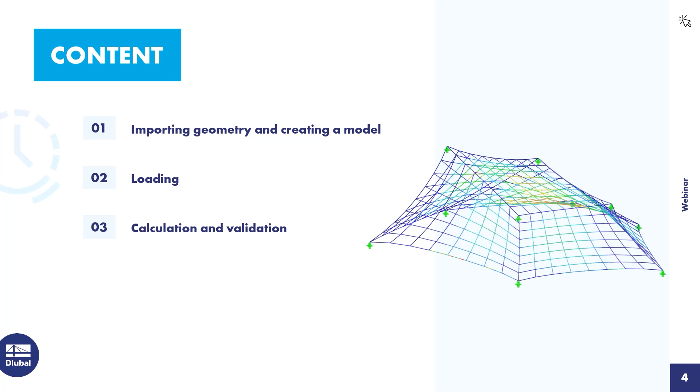So imagine myself being a civil engineer and an architect comes up to me and says, I designed this cable net structure, which is supposed to be a climbing frame for children, and I ask you to construct this. So you have the task now to find the right pre-stresses for this cable net structure so that the shape and geometry stays put and maintains the shape like the architect wants it to be, as he designed. So this is the scope, and let's go into the software and have a look how to do this.

At first, we need to create a new model. I'm going to name it simple cable net. And I'm going to deactivate surfaces and solids as I don't need them, so the data navigator becomes a little bit clearer.

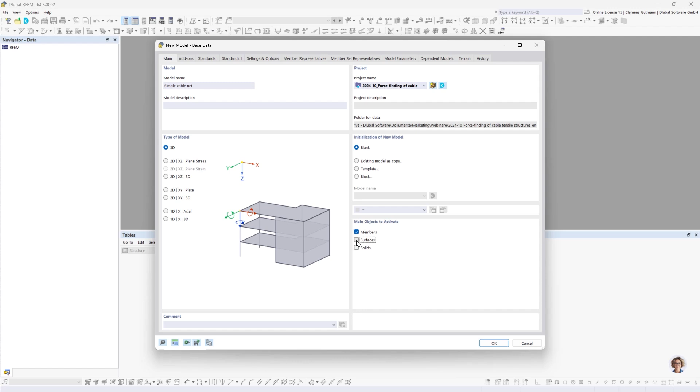Additionally, of course, we need the add-on form finding.

We then proceed with the modeling, and my simple cable net shall consist of an arch with a gauge of 1 meter and a width of 10 meters.

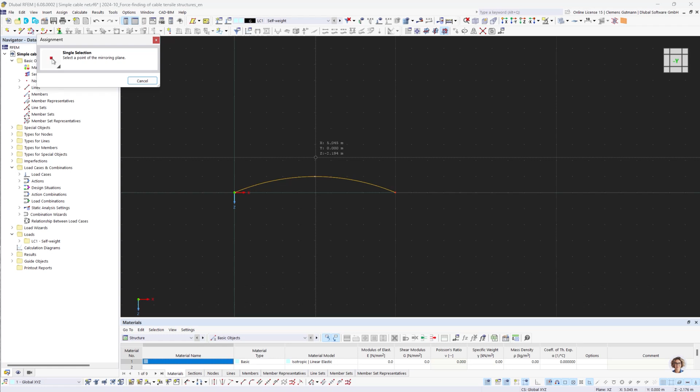I then want to mirror this about the XY plane and the center point, one time. Sorry, I made a mistake, forgot to check the copy option. And these two arcs I want to connect by straight lines.

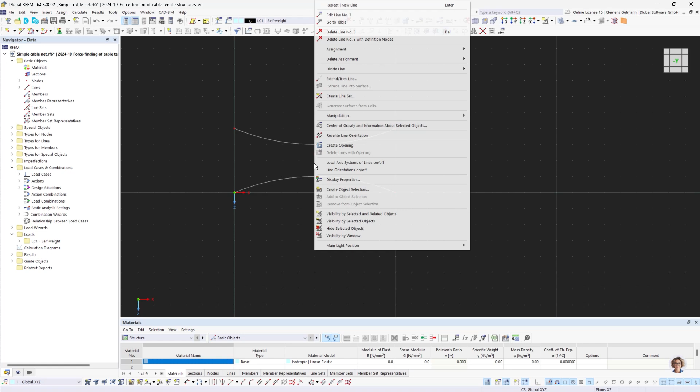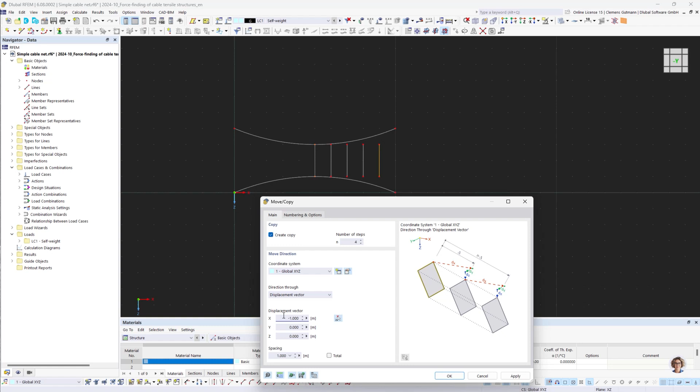And those straight lines I want to copy with a distance of 1 meter in either direction, so 1, 2, 3, 4 times, at 1 meter, hit apply, and then again in the other direction.

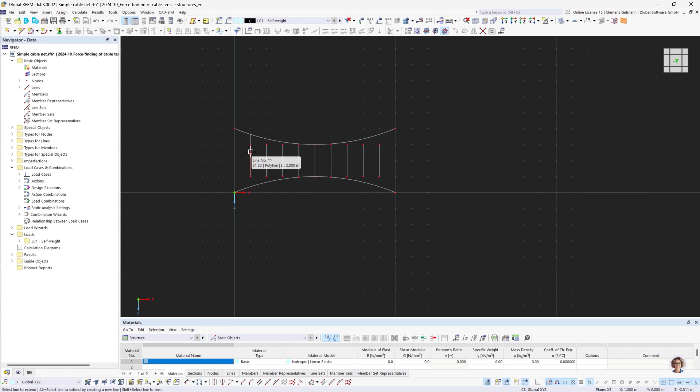I want to connect those straight lines now to the arches, and there's a quite handy way to do this. There's an option that hasn't been available in the software for too long, the extend graphically command. There's also the opposite command, trim graphically, which does the same but the other way around. If I click on it and hover over the end of a line, it automatically searches for other lines in that plane and creates a preview where an intersection has been found. If you click on it, the intersection is made and the line is extended to the other line. That way, complex intersections can be made quite easily and fast.

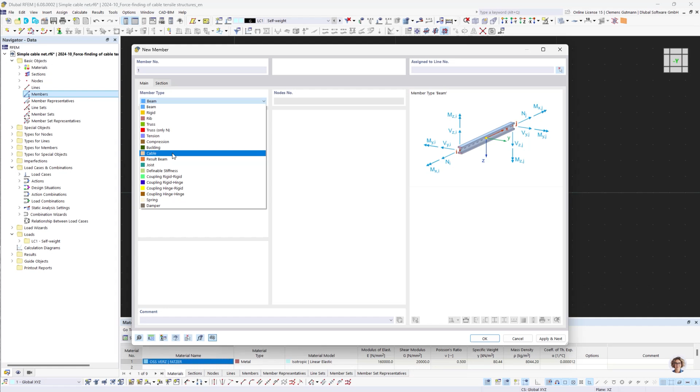Okay, and a section, a round bar section with 10 millimeters diameter. I then want to assign this section to all the lines I've created, and of course the member type is supposed to be cable. Select all lines.

The colorful squares you see is an indicator that member representatives have been found. This is quite a handy feature if you want to design a structure. The software searches for members that have the same property and the same shape and groups them together in a so-called member representative. But since I do not want to perform a design today and every member is different, I deactivate this in the display navigator.

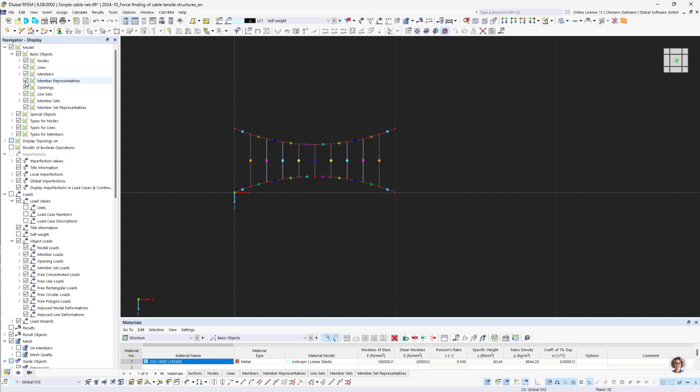Next step would be to assign a nodal support to the corners. Let's make them a little bit bigger.

Okay, and now we can define our load cases. Today I do not want to use the self-weight for this model, but just a pre-stress load case.

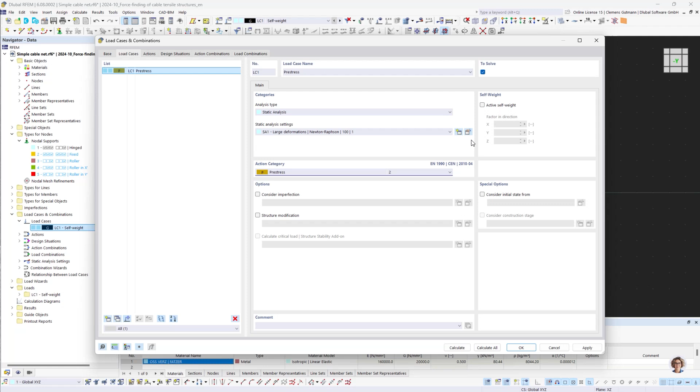And there's another setting that we have to adjust, and that is in the static analysis settings. So I'm going to edit those. If you activate the form finding add-on, you get a new tab for the add-on here, and there are 3 options that I'm going to explain to you very quickly.

The number of iterations for loading pre-stress determines how often the form finding solver tries to find a solution for the boundary conditions that you gave to him. So if you define form finding loads, either force loads or geometry related loads, those are boundary conditions for the form finding solver, and he tries to find a solution that matches the boundary conditions the best.

Usually if you perform form finding, 15 is a good number, but since we want to do a force finding and we want to get a very exact result, I'm going to increase this number to 60. Depending on what model you want to force find, you have to try out yourself what number fits best. At a certain point, if you increase the number further, it will not result in a better result.

The second option is the speed of convergence. This is a setting where you can influence the stiffness of the members and the membranes. This is especially interesting if you have structures with large deformations during the form finding process.

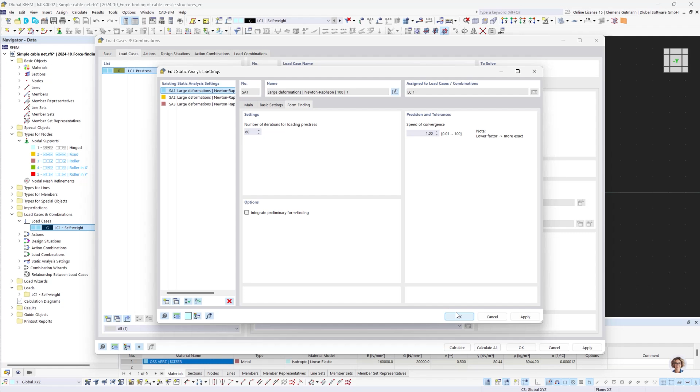Since we do not want any deformations, those last two options are not for us today, but I still wanted to explain them to you. We click OK, and again OK.

Now we can define our member loads, and for this I'm going to use the load type form finding, of course. At first I want to create an average force in member definition for the member in the center.

It's going to be 1 kilonewton, but as you may know, with form finding, it's actually irrelevant what size you pick. What matters is the ratio in the different directions. So you could also pick 10 or 0.1 or 5, whatever you like. It's just a reference for the form finding solver to find the pre-stress level.

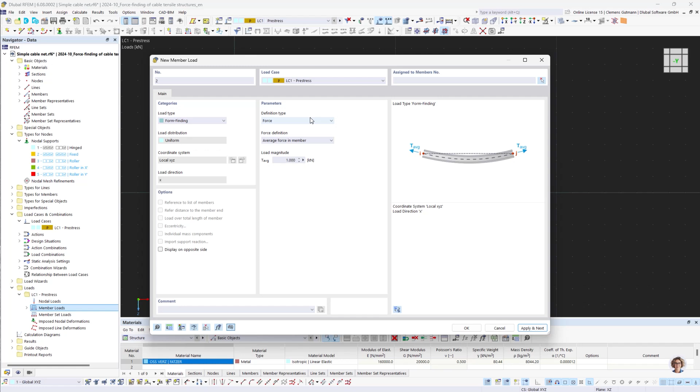Okay, we click apply and next. And to all other members, I want to assign a geometric form finding load with 100% length, so that all those members maintain their length. I'm going to assign those to all other members. Okay, and okay.

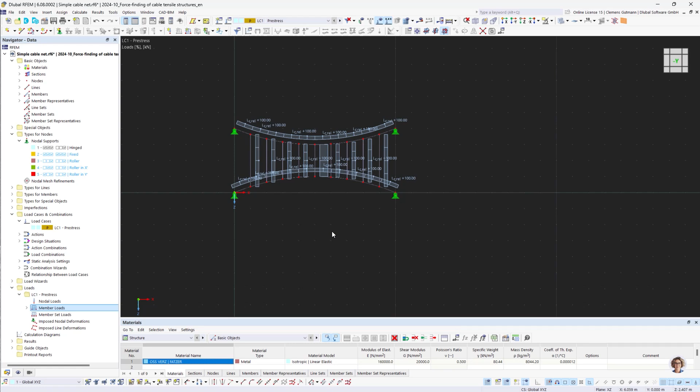Now we are ready to calculate this load case.

Let's have a look at the result. The result is not as good as I hoped, and there's a specific reason for this. Since the force finding method derives from form finding, it is impossible to force find a structure that cannot be form found.

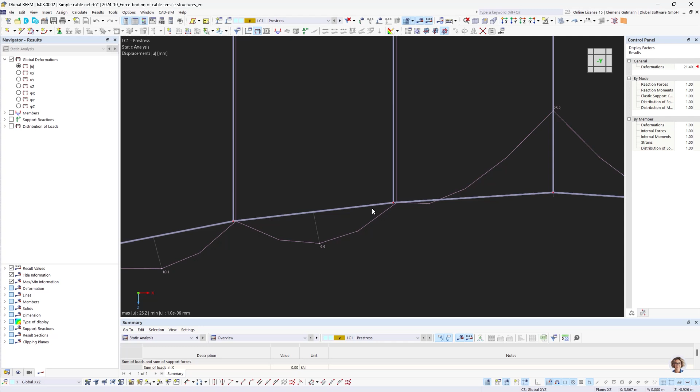In our specific case, the arch has a little kink in the small chunks of it, and if you apply tension to those chunks, it's going to be rectified. This is the deformation we see here now, and it accumulates in the middle, which is why the deformation is biggest there.

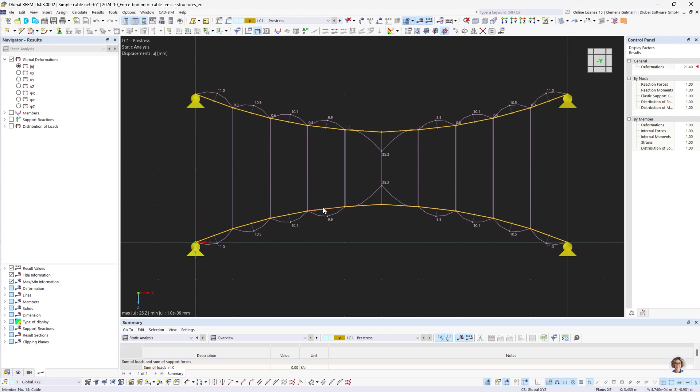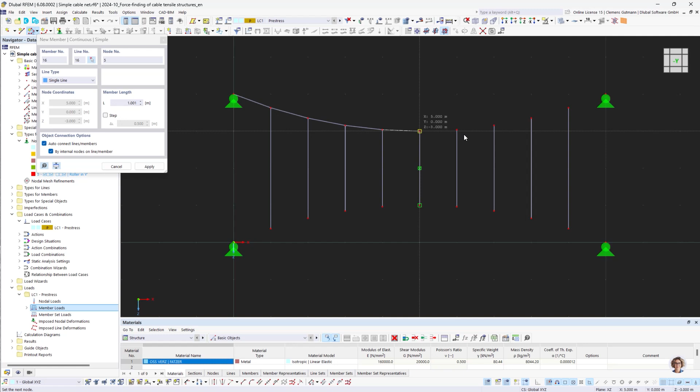To correct this, I'm going to delete those arches and connect the points with a straight member. I'll select continuous and click all the nodes. For the bottom, I'll mirror this again.

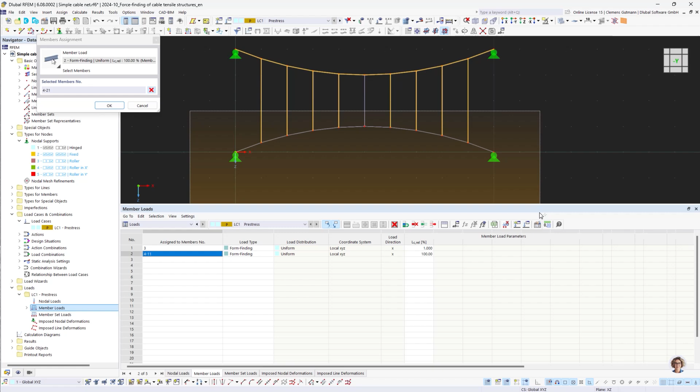Before we can calculate, I need to assign the loads again to the new members. Let's try this one more time.

Now we get the result that we've expected. There's almost no deformation, it's negligibly small, and we get a normal force layout that is reasonable. We have 1 kilonewton in the middle, and like a hanging bridge, a bigger normal force in the arched cable members.

To show you that this is a real result and that the form finding solver did not imagine something, I want to validate this result. I wrote myself a little Python script that reads the result data of load case 1, then filters it to get the internal normal force, which I want to assign as an initial pre-stress to the members in load case number 2.

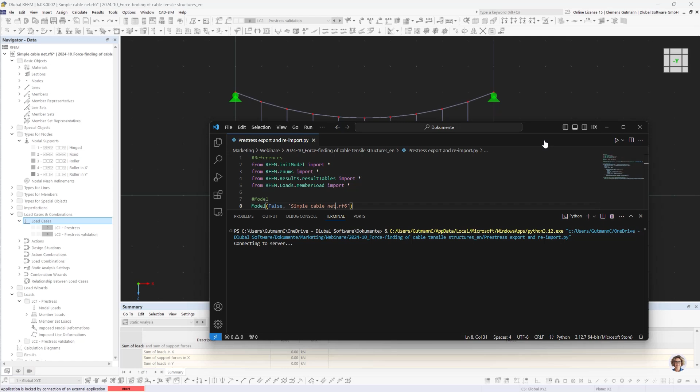So now the script contacts RFEM, and we're going to see that the program is locked through the script while it performs the steps I've explained. Now the software is unlocked again, and we can proceed with analyzing this model.

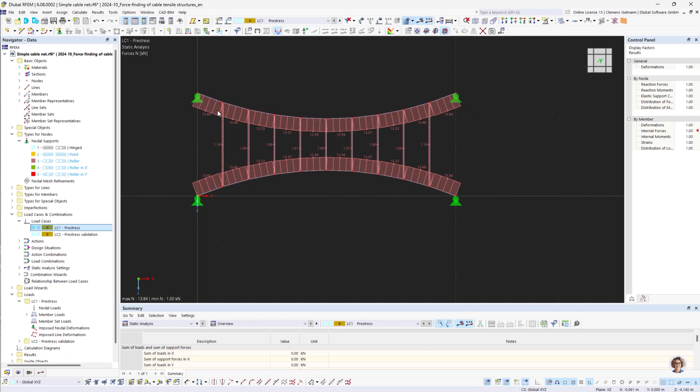Let's check whether the script has performed correctly. We have 13.84 here on the left and 12.99 in the middle. If we go to load case number 2 and look at the loads, we can see those same values on the left and in the middle. So that worked out.

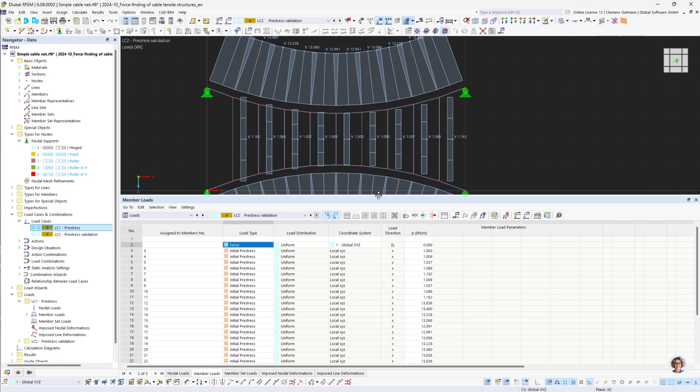These loads, as I said, are of type initial pre-stress. It's a member load, not a form finding load. It's the initial pre-stress for the member, and we're going to see whether this initial pre-stress is also the final pre-stress by calculating this load case.

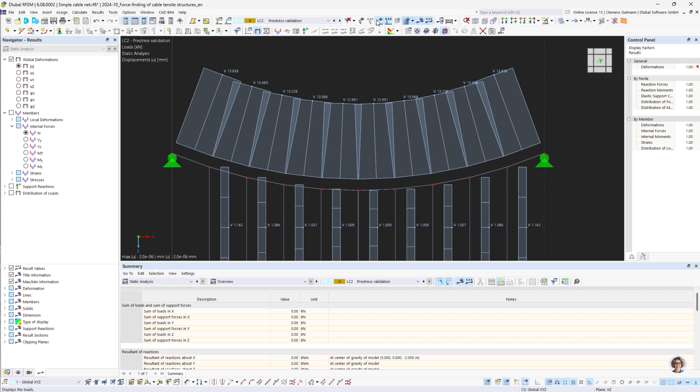As we can see, the result is very, very nice. We get as a final result the same thing we put in as a load. We can look at the global deformations, and those are even smaller than before. So the form finding solver found a valid and good solution for the boundary conditions we gave it, with no global deformations, and we found the force needed as a pre-stress for the structure to maintain its shape.

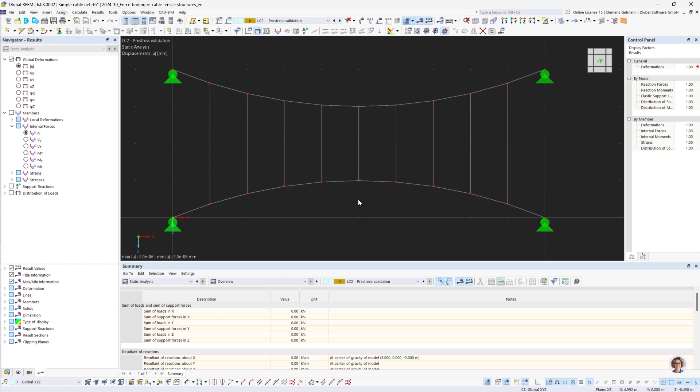We want to proceed now to the more complex structure, so we're going to create a new model. I'm going to name this climbing frame, and again we need the add-on form finding.

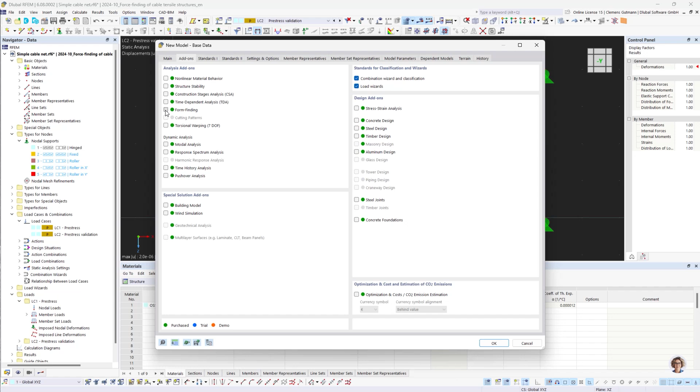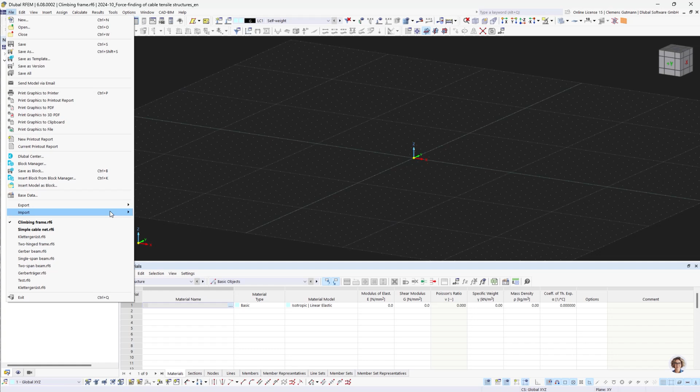Since I want to import the DXF file I got from my architect, I want to flip the global axis, because usually drawings have the z-axis pointing upwards. Now I can go to File, Import DXF, and import the file I got from the architect.

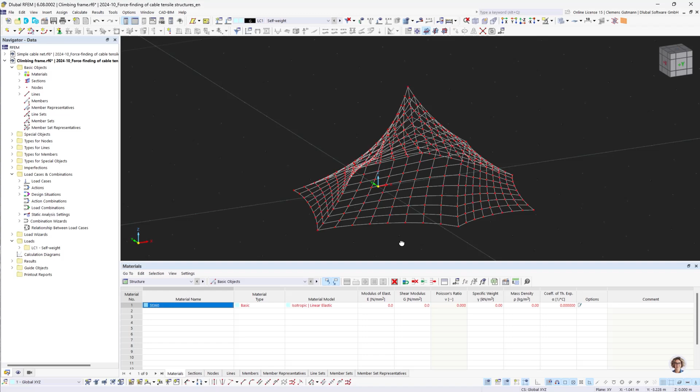The import has been successfully performed, and as you can see, the structure, the geometry, is a lot more complex. Let's check whether it is correctly drawn with a quick model check for identical nodes, none, and overlapping lines, none. That's good.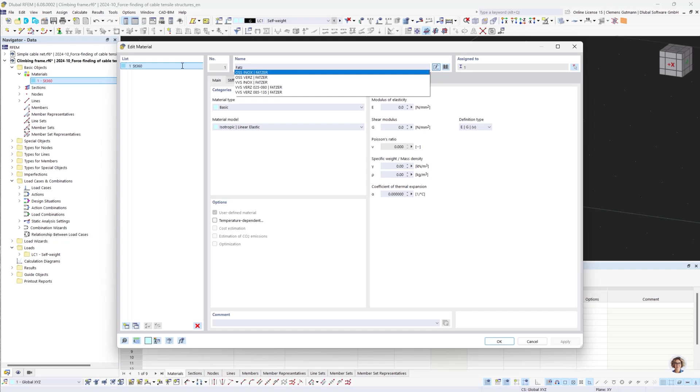Now we can proceed with the material. I want to use the same materials as before, so this cable material and the round section material with a diameter of 10 millimeters.

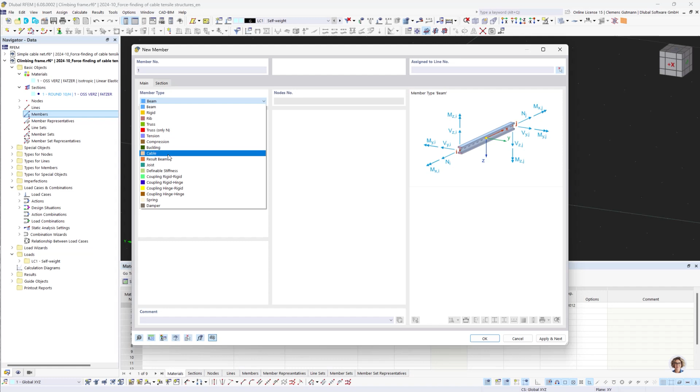New member, again cable, and assign this to every line individually. This is even more colorful with the member representatives, so I'm going to deactivate those again, as I don't need them here either.

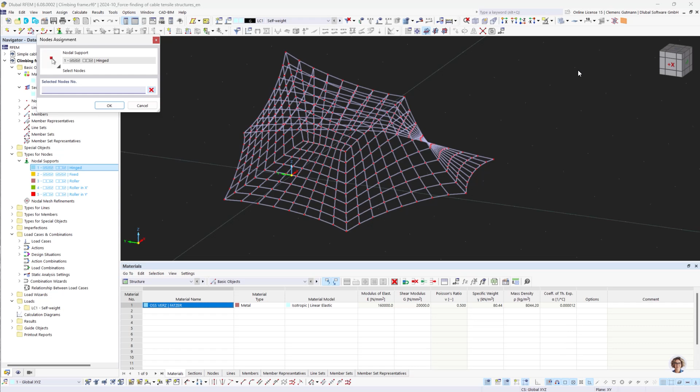Next step would be again the support, and the substructure usually consisting of some columns and a circular section. I do not want to model that today, so I'm just going to hold all the corner points.

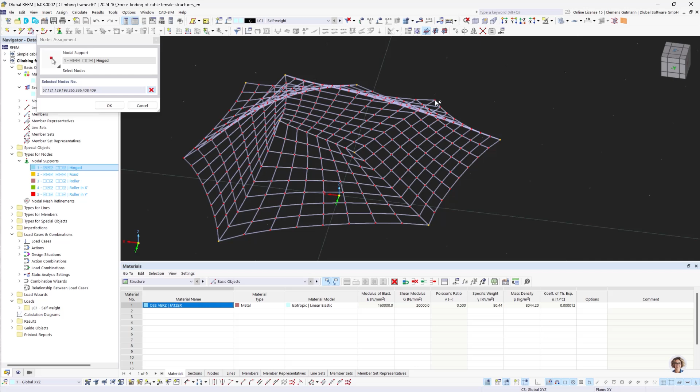For the pre-stress load later on, I want to parametrize this to show you the influence of the pre-stress level. So I'm going to define a new global parameter, and I'm going to name this pre-stress level, and this is going to be a float value, and let's start with 0.1 or 10%.

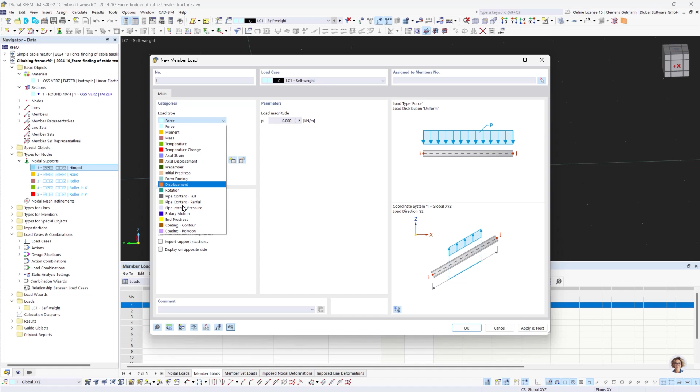Hit OK, and create us some loads. I want again to assign one form finding load of type force with now a parametricized force. So I'm clicking on the right arrow here and select the option Edit Formula.

And I want the pre-stress level variable that I've just defined times the section area of the cable. So I'm typing in sections, and my cable has the section number 1, and I want the area of this, and I want to multiply this with the yield strength of the cable, which is usually 1770.

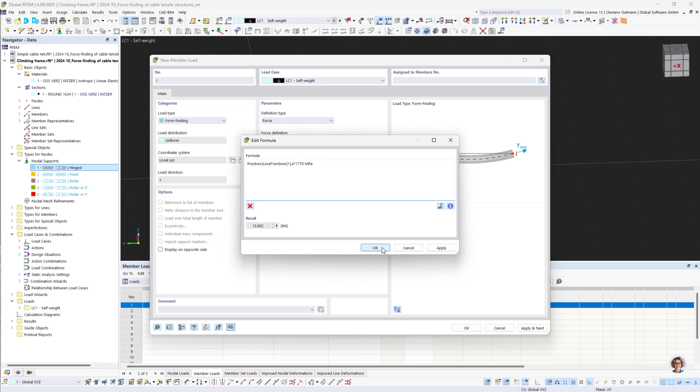MPa. So usually the formula editor reads the SI units, so newtons, meters, kilograms, and so on. But you can tell it that it is another unit by just typing MPa, and now it gets that this is a different unit and calculates the value accordingly. We click OK, and now we have a yellow triangle in the top left corner, and this indicates that this value is a result of a formula calculation.

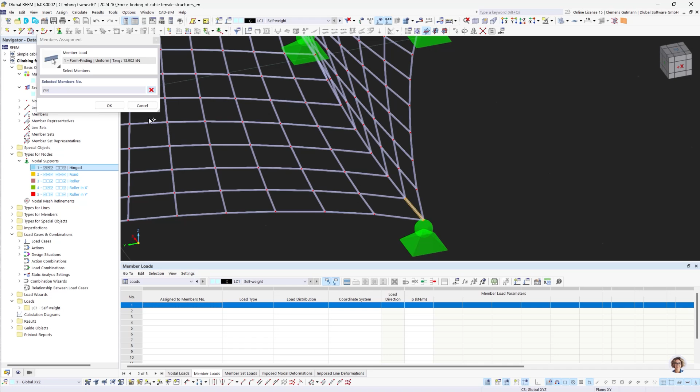And I want to assign this to a member that I know is going to be under a lot of pre-stress, and I assume that those are going to be the edge cables. So I'm going to pick this one right beside the support. Apply, and next.

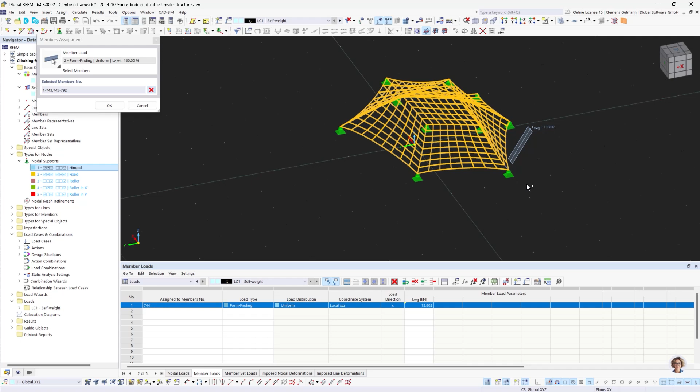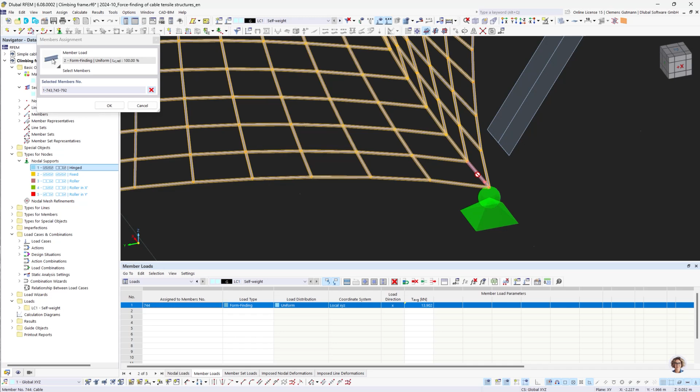And I want to assign to all other members again the geometric definition type of 100%. Select all. You notice that although I selected also this one member, it's not selecting it because you can only define one form finding load to a member. There cannot be two boundary conditions for the form finding solver for the same element. So yeah, this is why. Click OK, and OK.

Good. Now let's go to the load cases and combinations. I again only want to use a pre-stress for now and deactivate the self-weight, and make some changes to the static analysis settings.

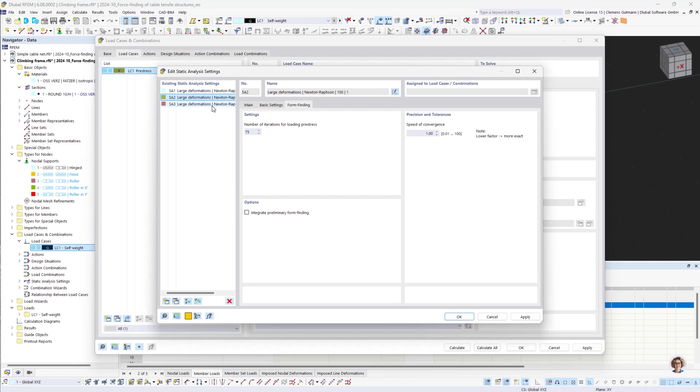And now I want to show you what the influence of this form finding iteration number is on the result. So for the first calculation, I'll leave it at 15. Then I want a second analysis setting with 75, and then 150.

And we'll take a look at what affects the result. Let's calculate everything.

And have a look at the results. So we have not that large, but still significant deformations of almost 20 millimeters. And this is due to the fact that the number of iterations is set too low.

So let's try again and assign the second option with 75 iterations and calculate the load case again. Now we can see that the result has gotten a lot better.

We have an almost negligible size of the deformation, and let's try one higher number with 150. So let's remember the 1.8. Calculate this again.

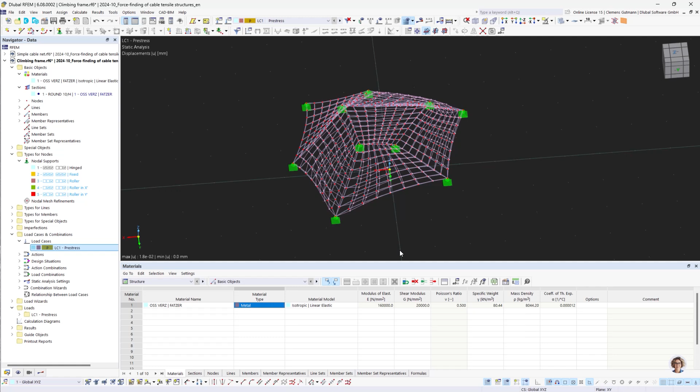So as you can see, the result got a little bit better, like one decimal place roughly. And you have to think for yourself if this improvement is necessary. For me, I think the number of 75 is sufficient, and we can save some time if we limit the number of iterations for the form finding solver here. Good, so let's calculate the results again.

Did not save that. Okay.

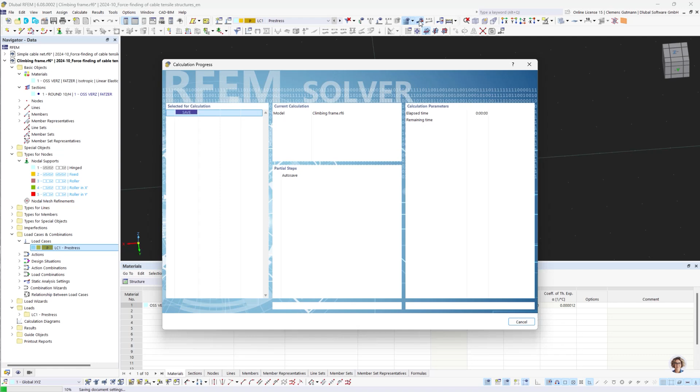And another thing that I wanted to show you was the influence of the pre-stress. So if you take a look at the normal internal forces, we have here the 13.9 that we predefined earlier.

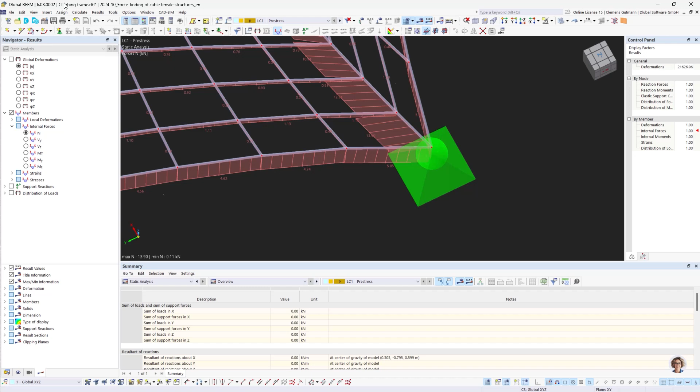And I'm going to change now the global parameter to 500% and click OK. Let's calculate again.

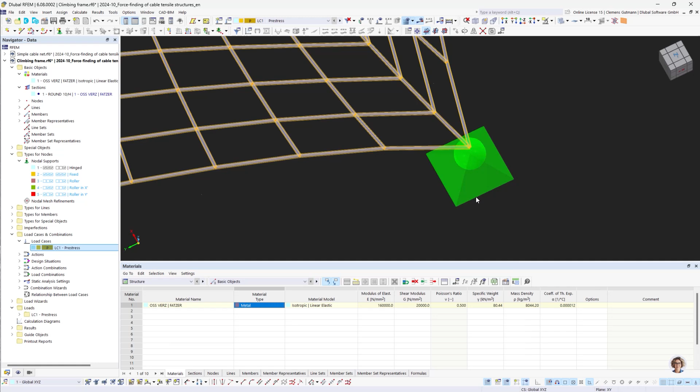And as you can see, of course, the number has increased, but it is still the predefined value of 69.51. And if we take a look at the global deformations, the value of the global deformations is lower than before.

That is due to the fact that a higher pre-stress yields a higher stiffness of the geometry, but as you can see, the influence is not significant.

With this model, I also want to show you the validation of the result. But since this model has more members, it takes some time for the results to be transferred into the new load case 2, like before. So I prepared another model where we already have those results, and I'm going to open this now.

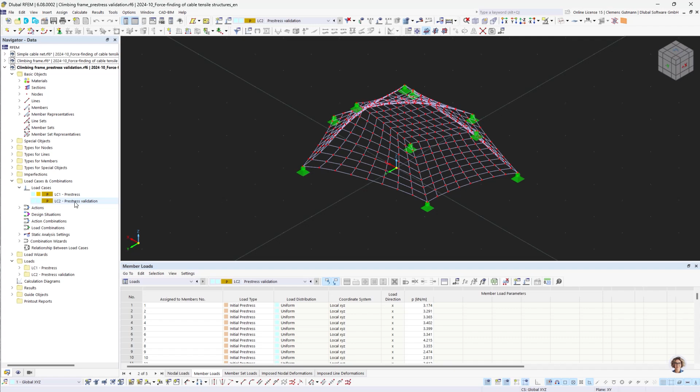So let's have a look. I have created a new load case number 2, like before, and the initial pre-stress loads are the same as the results of load case number 1.

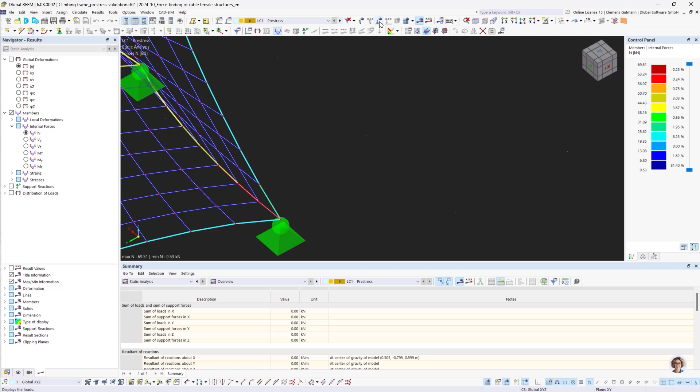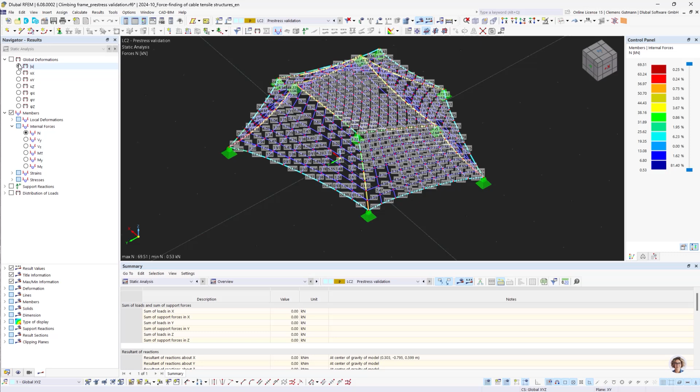So this is the same result values here. Let's calculate this and see whether the deformation changes or stays the same. And as we can see, the deformation is good, it's neglectably small. So again, the form finding solver found a valid and good solution for the given boundary conditions for this complex structure.

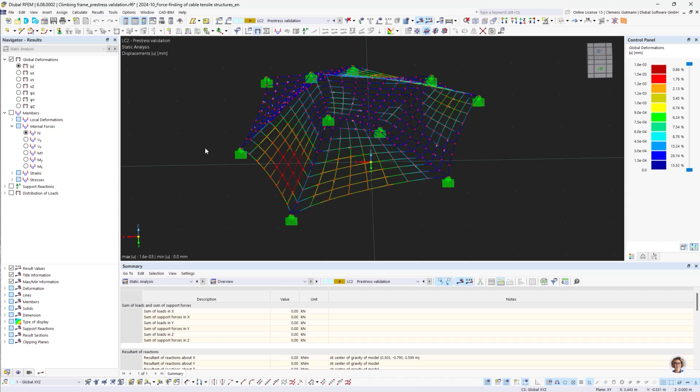Let's go back into our original model. I said that I deactivated the self weight, and I want to show you what effects derive from activating this option. Calculate.

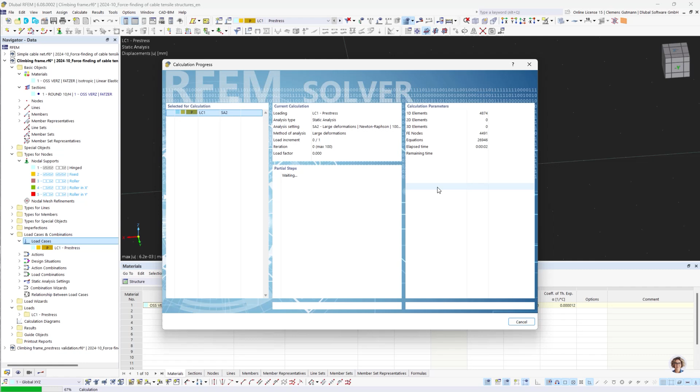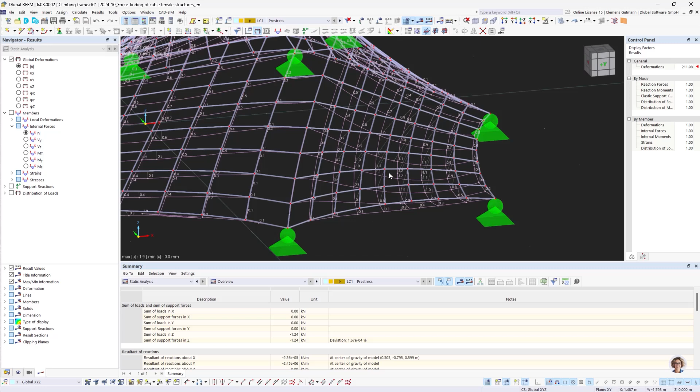Like I said before, you are bound to the rules and laws of form finding. Because we have at some places a very small stiffness in the global Z direction, there are some notable deformations in terms of civil engineering, still quite small with less than 2 millimeters, but there are limitations, of course, physical limitations to the form finding method. Still, I think this is a good, practical result.

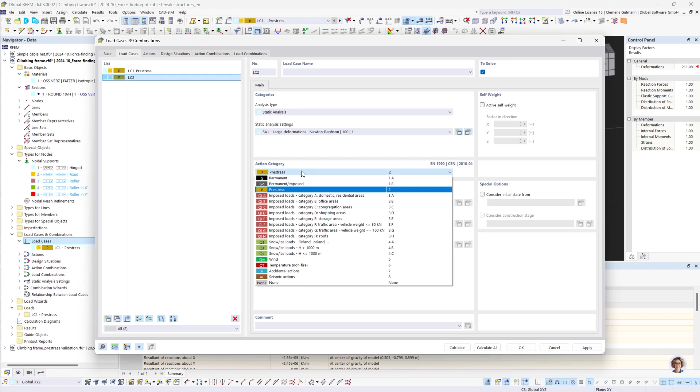Let's see how the structure reacts to a child load. Usually you have a man load, but since this is a climbing frame, I'll apply a child load to this instead. And I want to consider the pre-stress load case as the initial state for the calculation of this load case.

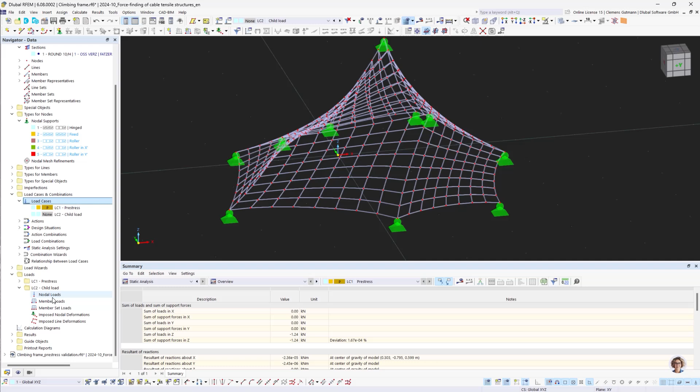Let's apply some node loads of maybe 0.5 kilonewtons to some nodes here in the model. So maybe a child is up here, and maybe another one down here, and over here, and maybe over here.

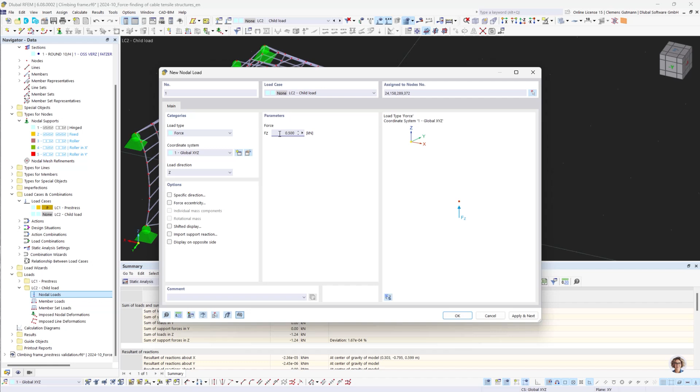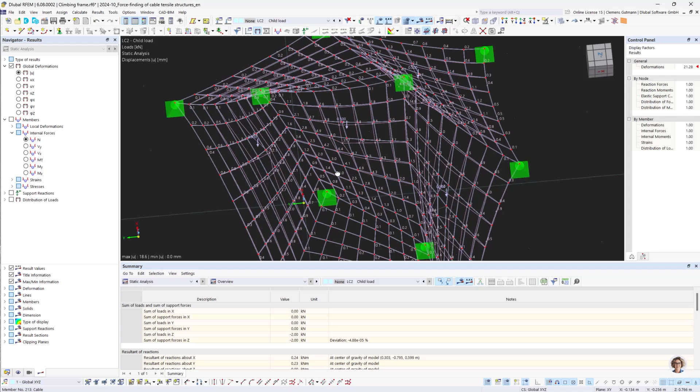Let's check out the results for this. And as expected, the deformations get higher, and this is due to the stiffness of the cable net in that direction. But still, I think with less than 20 millimeters, the deformations are neglectably small.

But let's see what effect the level of pre-stress has on the result. So let's go back to only 10% pre-stress level and see which deformations we get now.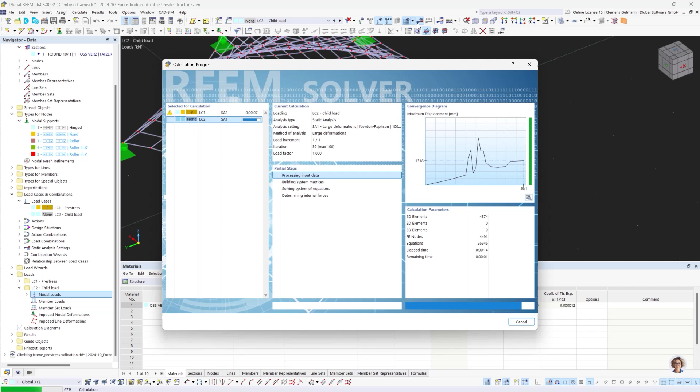Okay, we got an error. That is due to the fact that the number of iterations for the calculation is set too low for this model. Let's try again with a higher number of iterations, so the solver has some more time to find a solution.

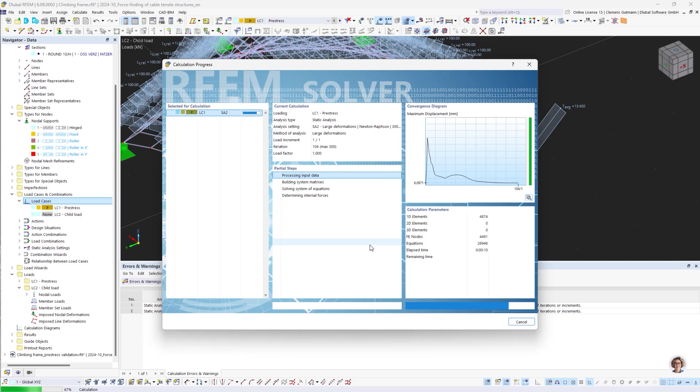Okay, just a little bit more than 100. It didn't calculate the second one, let's do this again.

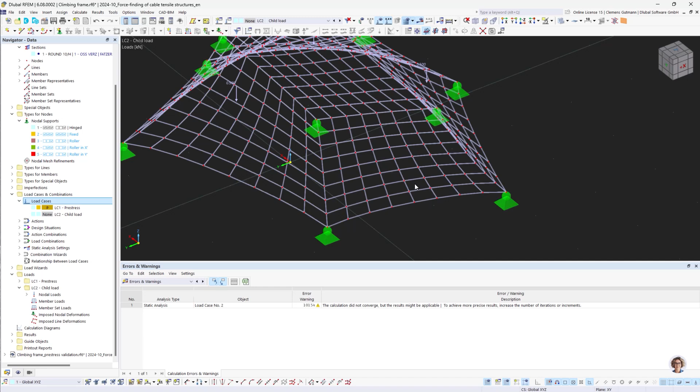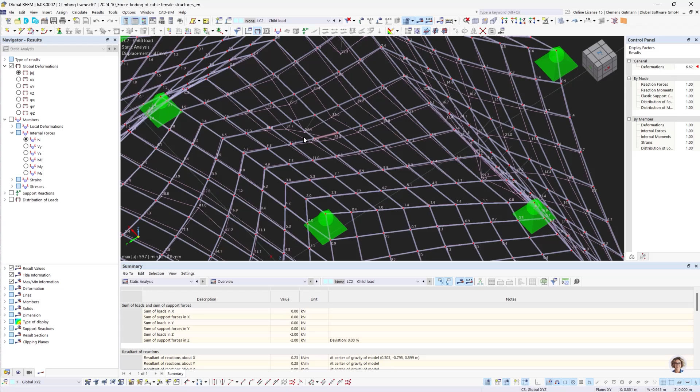So for the pre-stress level, we have the expected results, or closely. And for the deformations with the child load, we can see that the deformations have gotten significantly larger, with almost 60 millimeters now. Still, I think okay, but there's an influence of the pre-stress level later on, not for the form finding, but if you use the form found and pre-stressed structure for additional loads, it makes a difference what pre-stress level you have applied to the model.

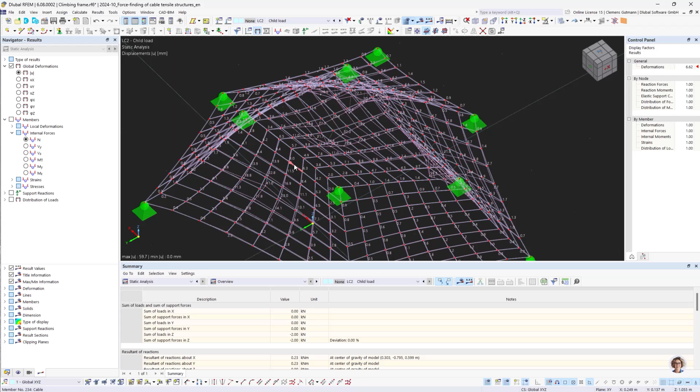And this is all I wanted to show you today. Thanks for watching, and I'll give back to Andreas now. Thank you.